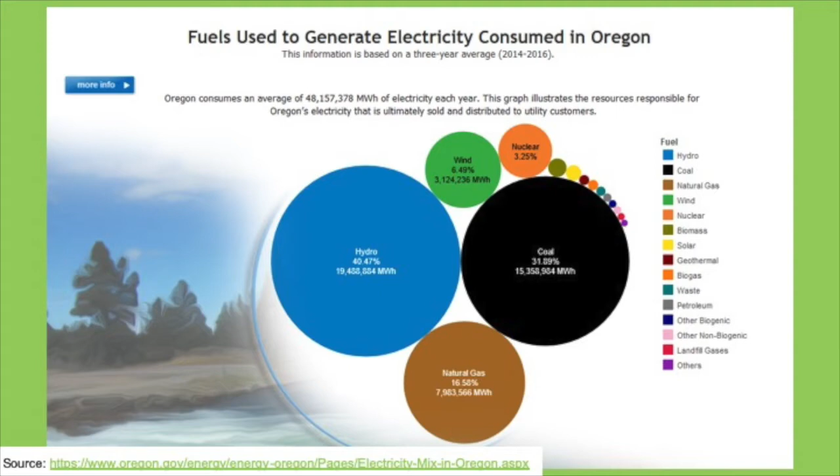How is energy generated in Oregon? According to Oregon.gov, from 2014 to 2016, this is how Oregon's electrical energy was generated: 40% from hydroelectric, 31% from coal, 16% from natural gas, 6% from wind, 3% from nuclear power, and many other minimal sources, including solar. Oregon has been working to increase its sustainable energy sources, offering tax incentives or rebates for consumers wanting to invest in solar energy. There are also tax rebates offered by the federal government.

Here's a slide that shows how solar energy production has increased since 1999. As you can see, the largest increases in solar production have come from the utility sector since 2015, although the commercial and residential sectors have kept growing, but just not as fast as the utility sector.

A little closer to home, what has PCC done with solar? In 2012, the Rock Creek campus of PCC worked with Solar City, PGE, and the state of Oregon to install a 500 kilowatt solar array. This was expected to provide at least 60% of the energy used by Building 9.

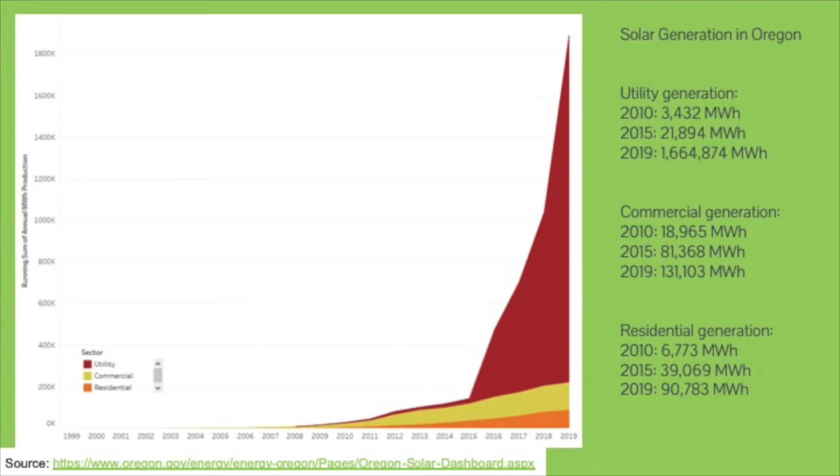Solar energy is still a growing industry, shows no signs of slowing down, is becoming more affordable with all the incentives, and the cost to make them is going down over time. And solar energy is a clean, sustainable energy. Up next is Raul with the topic of wind energy.

What is wind energy? According to windsolaralliance.org, wind energy is the use of wind to provide mechanical power through wind turbines to turn on electric generators and to do other work like milling and pumping water. Wind energy is a serious and impactful component of electrical power generation. This website talks about how wind energy is a clean source of electricity which keeps electricity rates low and provides a renewable alternative to fossil fuels like coal, oil, and natural gas.

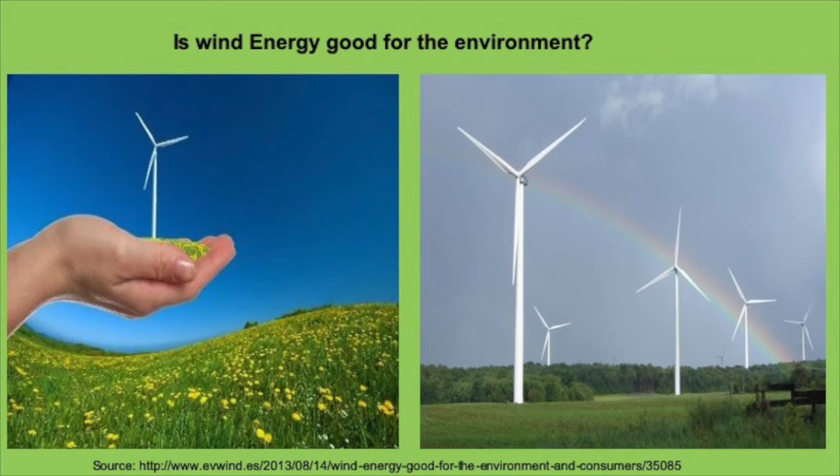Although there are pros and cons of wind energy, and there are some disadvantages to consider, wind remains one of the cleanest and most friendly sources of energy available today. And now, here is Hong Pham and Justin Stenberg talking about sustainable food.

Why is sustainable food so important? There's lots of reasons. Biodiversity loss of plant species, interference of the nitrogen cycle, food shortage being caused by food waste, and even climate change from the food waste. This still isn't everything it impacts.

According to the Washington Post, in an article they made in July of 2018, globally we waste 30% of our food, which accounts for 8% of our total greenhouse emissions. More than 70 billion tons of greenhouse gases could be prevented from being released into the atmosphere by cutting down on food waste. By cutting down on food waste, we can feed more starving people.

What are some of the ways we can help combat food waste? Shop smart and purchase more produce from the local shops or farmers markets. Eating your leftovers, keeping track of what you throw away, invest in composting options. You can do a whole lot with the waste we just throw away.

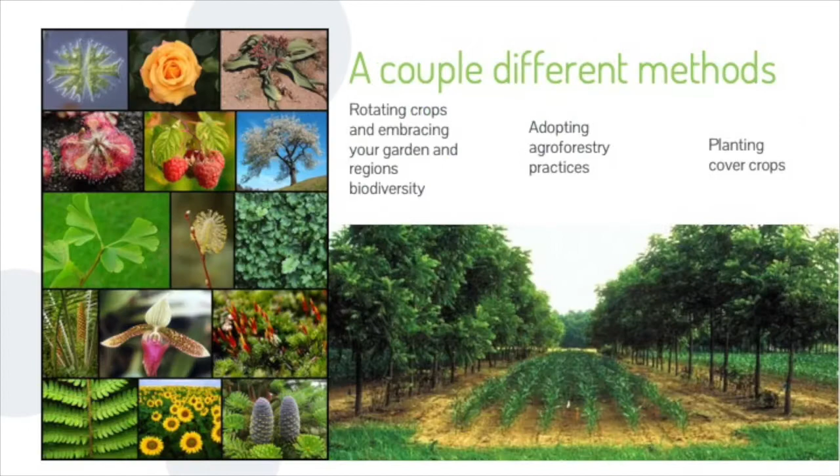When we researched sustainable food, we found that PCC is very big on local and sustainable food. The PCC dining services offer smaller portions as well as offer trayless dining. They also compost food scraps. The kitchen scraps end up being turned into healthy soil for our gardens at Rock Creek and Sylvania.

Another interesting thing is that here at the gardens, you can volunteer your time to help with the gardening chores, which allows you to grab whatever produce you wanted that's available from the garden here. The food from the garden is additionally offered to the school and later on given to gleaners. If you're ever bored or hungry, I would consider it.

Agriculturally, we have a need for sustainability as well. The normal style of agriculture consists of heavy tillage and chemicals and is destroying our soil ecology while using up our water at an alarming rate. We are becoming more susceptible to drought and rapid deforestation and industrialization, and we are threatening our plant biodiversity.

A couple different methods for keeping our agriculture sustainable is to help rotate crops according to the seasons and your region. Proper agroforestry practices where trees and shrubs are growing around your crops can help control runoff, soil erosion, as well as reducing the loss of soil and water and other nutrients.

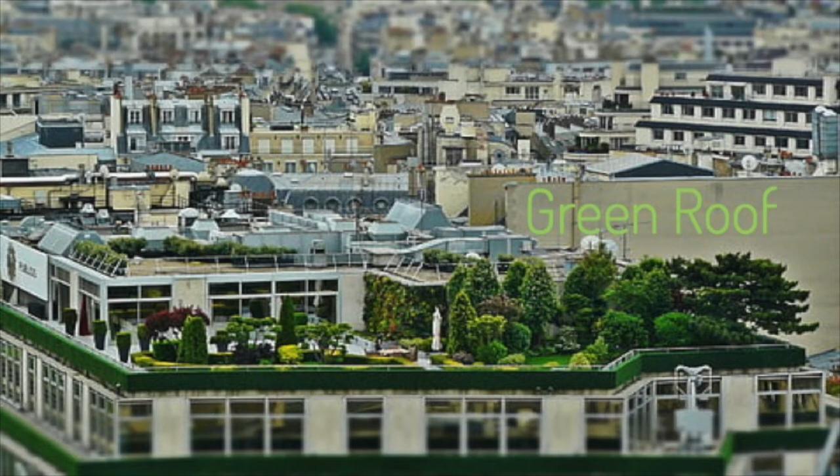A lot of money due to the addition of plants and installation. Keeping up with the maintenance is also a disadvantage, having the time and money to take care of the roof. Being able to prevent water damage to your home is also something your home may be vulnerable to.

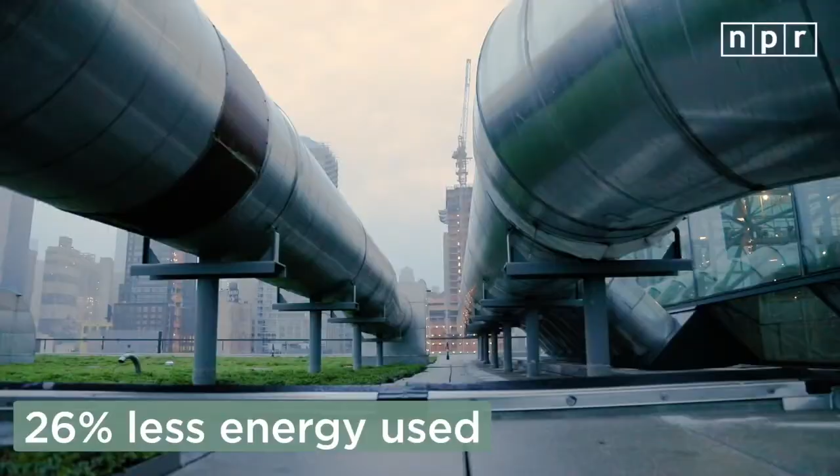It will add up to 50 to 200 kilograms per meter squared for each section of the roof. Some roofs will need to be remodeled to support the extra weight. For flat roof houses, this may not be needed.

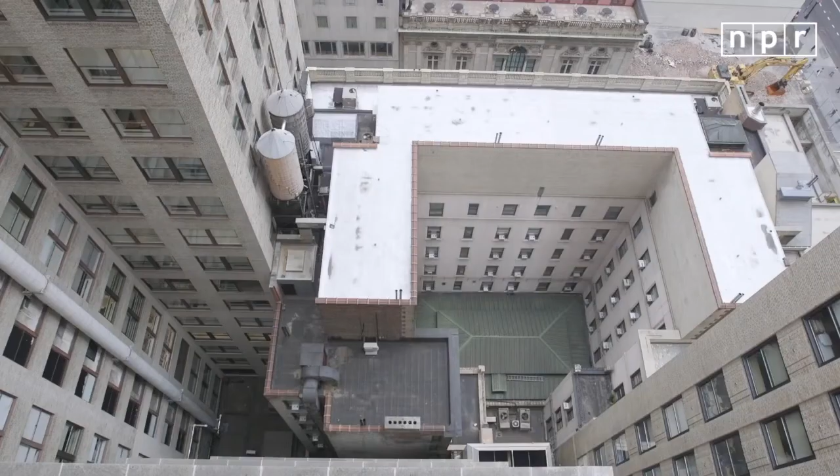Hempcrete. When being made, there is more carbon dioxide being consumed than made. It is made of hemp, which can't be consumed like weed. Hemp is very renewable and easy to access. When made, it is left to dry until the hemp can be soaked in water with lime. This allows the fiber to come out of the plant. Once dried, the hurds are harvested to make what they call hempcrete.

Disadvantages: cost. People must pay more to get access to the materials. Builders don't have enough knowledge on how to build with hempcrete. Hemp has only been legal for a few years, which hasn't allowed people to gain experience on how to make it or build with it.

The material may rot if it stays wet for a long period of time. Hempcrete can't be used for foundations. When used underground, the hempcrete absorbs water. It is best used above ground.

And speaking next is Aaron with the building envelope.

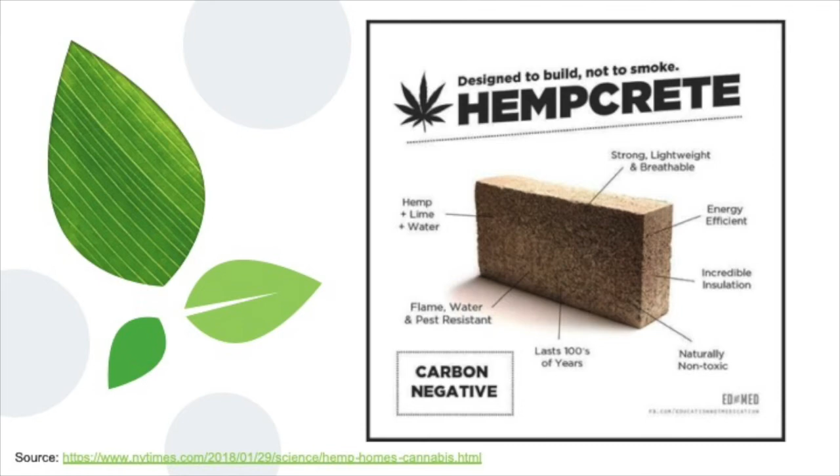Part of sustainability means building green. Building green means it includes materials such as bamboo, green roofs, wood, straw bales, and hempcrete. We will take a closer look at green roofs and hempcrete.

Green roof benefits: there is an increase in R value, which is the measurement of resistance that controls heat going through the roof. Green roofs also help improve stormwater intake. Instead of water just sliding off the roof and going into the gutter, the green roof allows the water to go into growing the plants instead.

This reduces the amount of water going into the streams and rivers. Heat reduction: large areas that have plenty of pavement tend to have increased surrounding temperatures. Green roofs absorb the heat, therefore reducing this effect.

The most important element of a sustainable home is its envelope. A properly designed and installed building envelope is crucial to the lifespan and energy efficiency of a home. What is a building envelope? The building envelope is the physical enclosure of a building that separates the conditioned space from the unconditioned space. In other words, the material separating the outside from the inside.

The building envelope's job is to resist and/or reduce four things from passing through the envelope, which are, in order of importance: bulk water, air, water vapor, and thermal. The most important thing we want to keep out of our homes is bulk water, like rain.

Our first line of defense against bulk water is the siding. Siding works great for shedding bulk water as it runs off the roof and hits the walls, but when wind is introduced, it can drive bulk water in between the seams, where it will sit and slowly rot away the building. How we can reduce this risk is by attaching a water-resistant barrier to the sheathing, which prevents bulk water from touching the sheathing. But this does not prevent the siding from rotting.

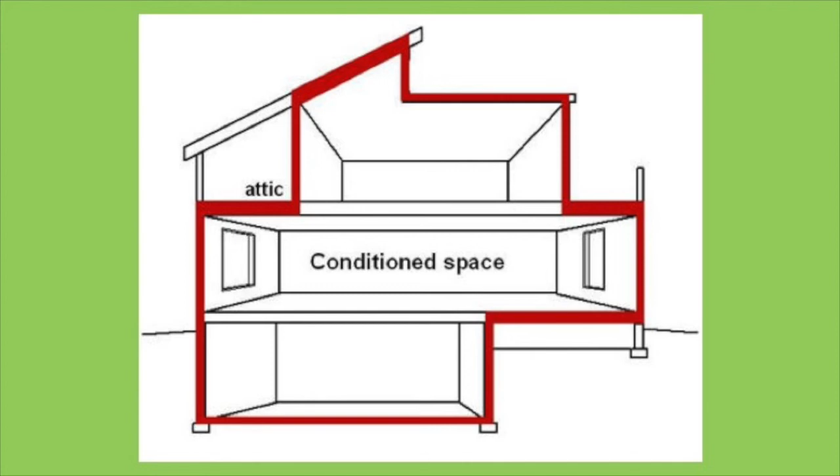To solve this, we also need to install a rain screen. A rain screen is a series of vertical strips attached to the exterior walls that the siding is then affixed to, creating an airspace between the siding and the wall. This airflow will allow bulk water that makes it behind the siding to dry.

The second biggest threat to a building's performance is the leaking of air. Air is like a highway, and water vapor and heat are like cars riding along its path. Up until recently, we've been designing and building homes so that they quote-unquote breathe, but what they're really doing is leaking. This way of building allows air, water vapor, and thermal to pass freely.

This way of building allows air, water vapor, and thermal to pass freely and uncontrollably through the building's exterior. As the heated inside air rises and escapes, it's being replaced by cold, damp air from your crawl space that rodents inhabit, a behavior known as the stack effect. This leads to excessive heating and cooling loads, unhealthy air quality, and potential mold inside the wall cavities.

Instead of letting your buildings breathe like a frog through its skin, we need to make them as airtight as possible and provide lungs for the intake and exhaust by means of mechanical ventilation.

Air sealing isn't a specific material, it's rather a method. Anywhere there is a seam, crack, joining of walls and roofs, light fixtures, or electrical boxes, there is a leak. We can seal these with tapes, mastics, caulkings, and spray foams.

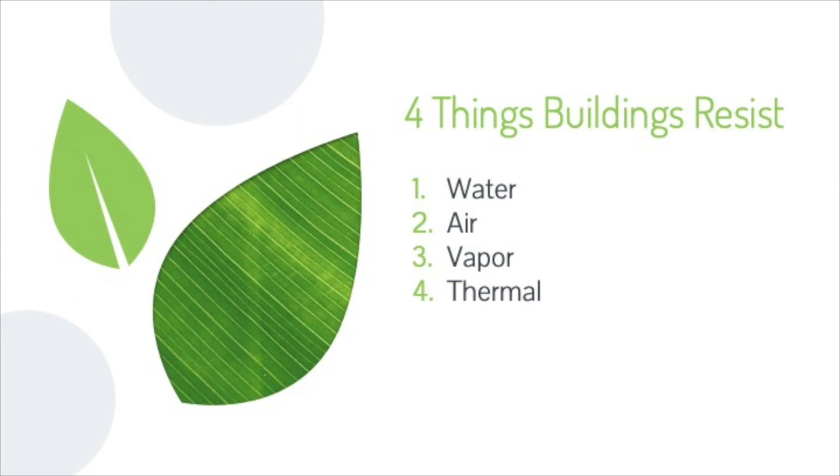Studs make up roughly 28% of the wall cavities, leaving only around 70% of actual insulation, and the rest is gaps in... I keep reading that wrong. Okay. I cannot say that for some reason.

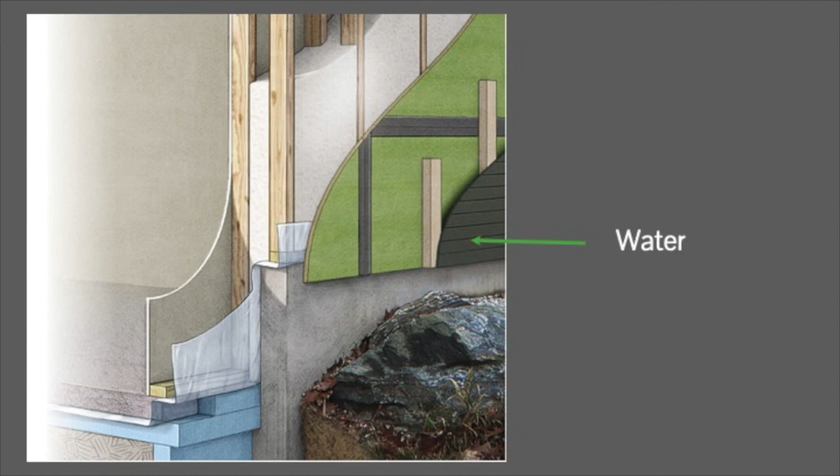Studs make up roughly 28% of the wall cavities, leaving only around 70% of actual insulation, and the rest is gaps from things such as electrical boxes. These studs are acting as a bridge for thermal energy to pass through the walls, known as thermal bridging.

Thermal bridging is eliminated when the insulation is on the exterior of the wall because it can run continuously, uninterrupted by the studs. The second problem relates back to water vapor.

We want the dew point to happen at the exterior of the home, not inside. As water vapor diffuses through the wall, it is kept at a low relative humidity passing through the insulation. When it hits the sheathing exposed to the cooler outside air, there is a chance for the dew point to happen inside the wall cavity. By having insulation on the outside, the sheathing stays warm, preventing the dew point from happening until it reaches the outside, where it can be dried out with the rain screen.

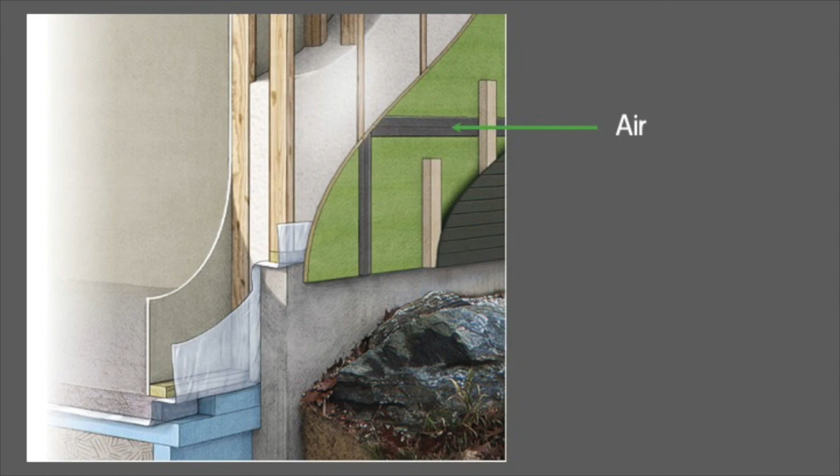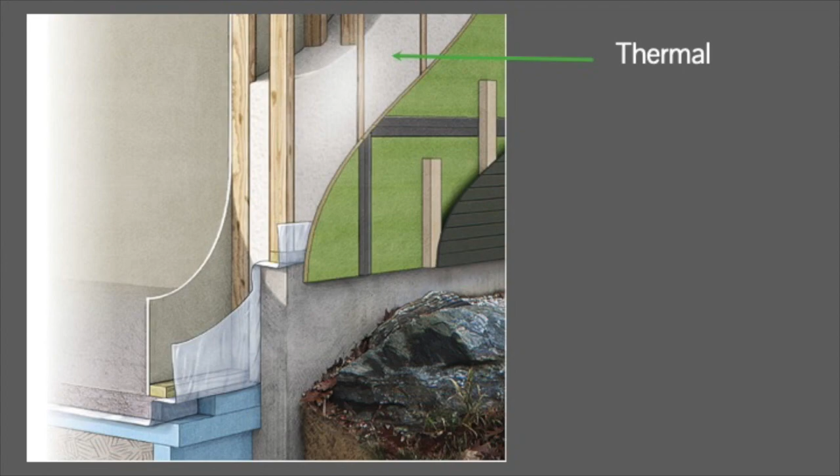There's a lot of science happening in our homes that we are starting to recognize. By changing one thing, we could potentially cause another issue if not done with careful consideration. This is why the building envelope is so crucial to the sustainability of a home, for its lifespan potential and its energy use. The topic can get very complex, but has been boiled down to a simple saying: build tight and ventilate right.